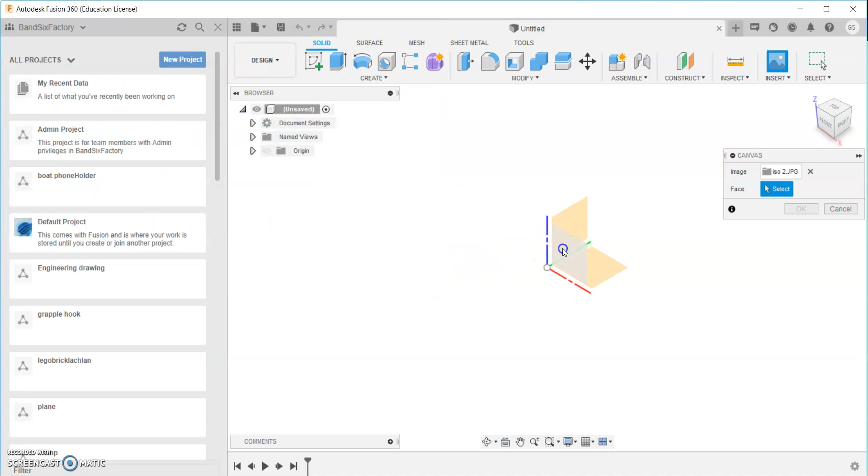First, let's open up the drawing and insert it into my main sheet so I don't have to go through the whole process again. I'll make it a bit bigger so I can actually see what I'm drawing, flip it the other way, and move it up into that area out of the way here.

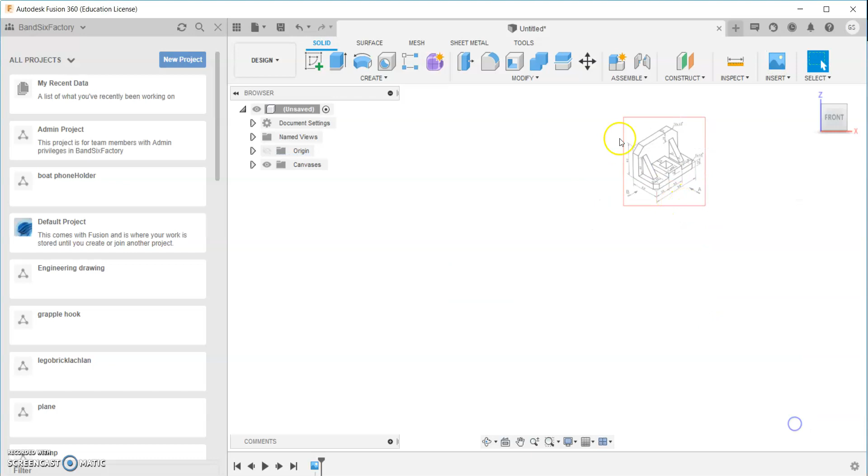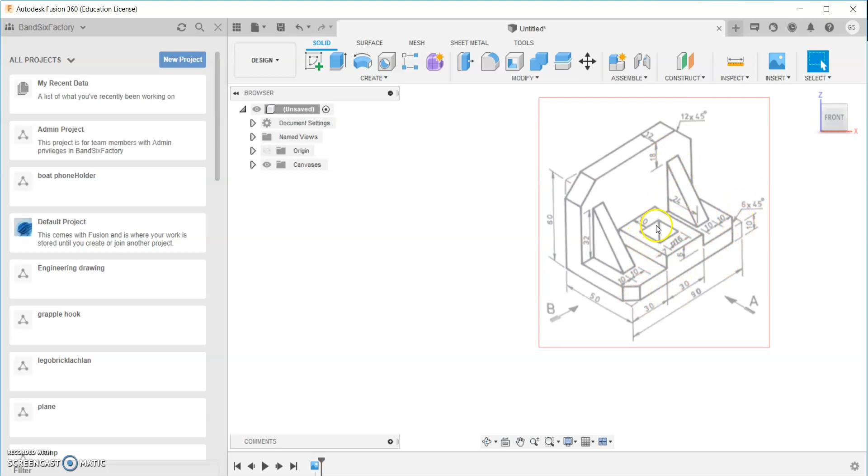Once we've got our canvas in there, we can zoom in and look at our drawings. This object is 90 millimeters long and 50 millimeters high. We have some 45-degree shapes in here that we cut out, and a square hole that's 16 millimeters, 10 millimeters.

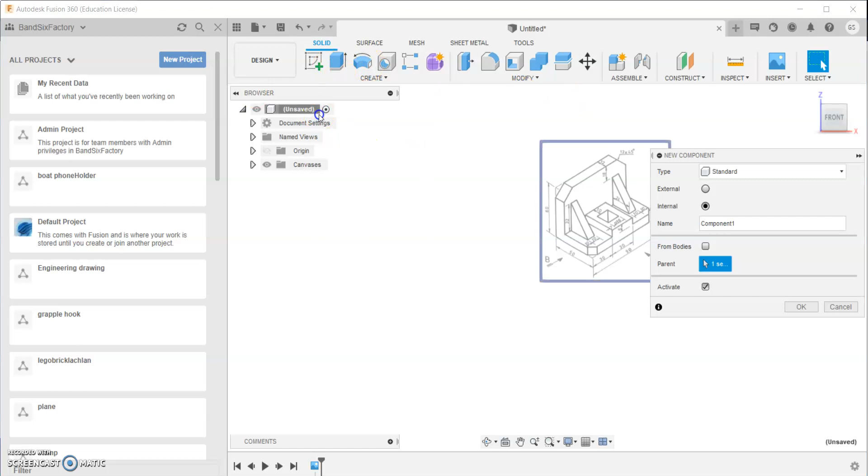So what we'll start off with, let's create a sketch. First we're going to create a component, so I'll go up here and select new component. Now it's active, so we'll start a sketch and draw that front view, which was 90 millimeters long, 50 millimeters high.

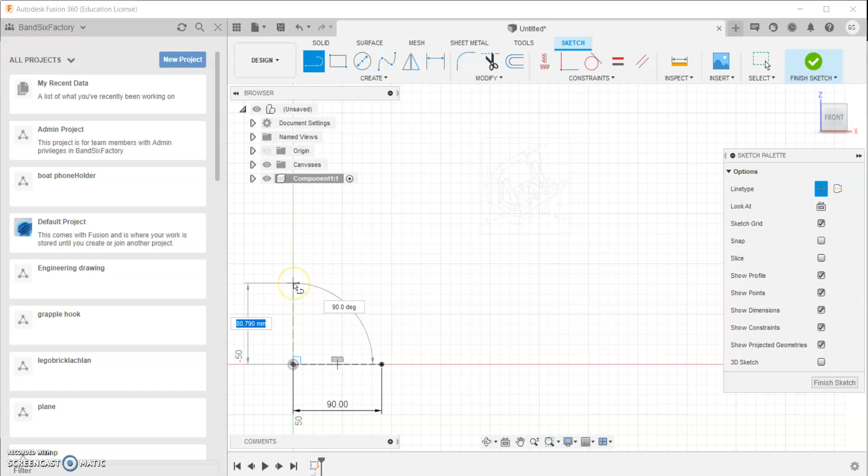I'm going to start to draw with construction lines. Let's go 90 millimeters long and 50 millimeters high. Then we have some 45s in there, 12 by 45, meaning the face is 12 millimeters long. That's a new little challenge for us. I'm going to finish off this shape over here, and then we'll go down here.

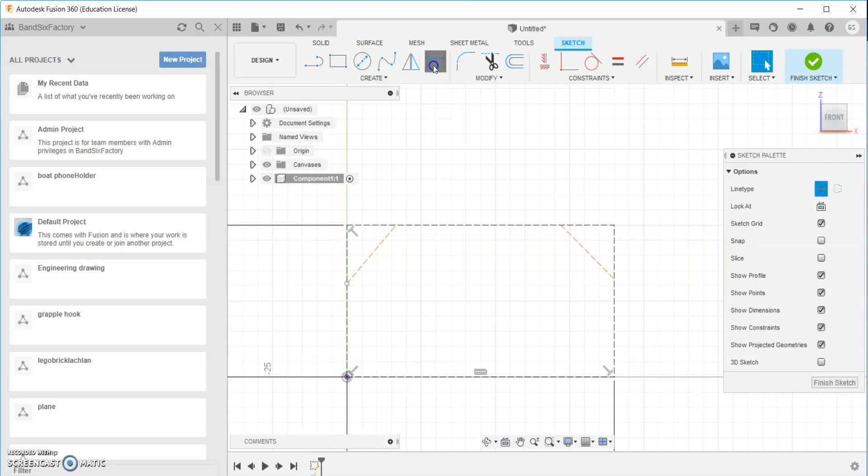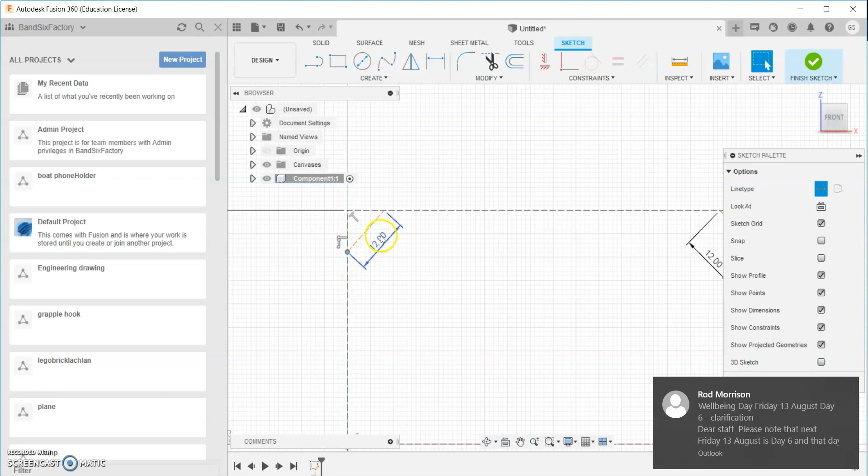Now I'm going to draw a line like that and a line like that. Let's get this length right first: 12 millimeters that way and 12 millimeters that way. We notice that one didn't actually connect, so we'll just drag that and snap it onto that point. See how it just made it snap? That's created a constraint there.

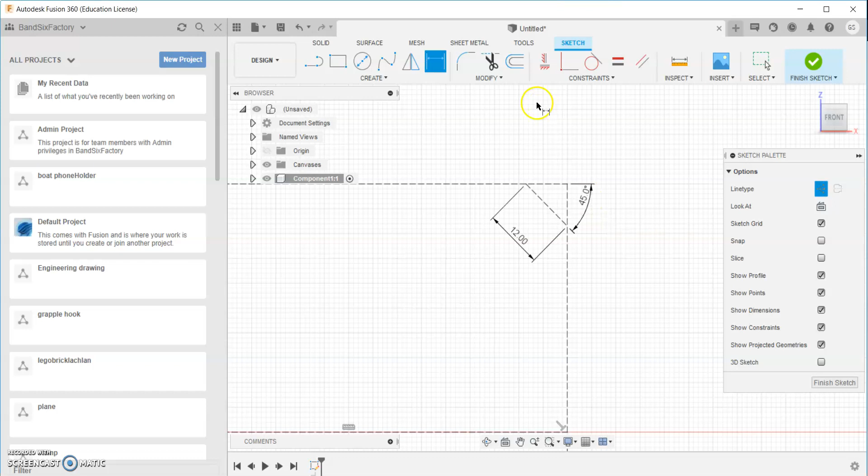Now let's get this angle right for the next part. Make that 45 degrees there, and we'll do a little 45 on this one too, 45 degrees for that one, and then that's 12 millimeters.

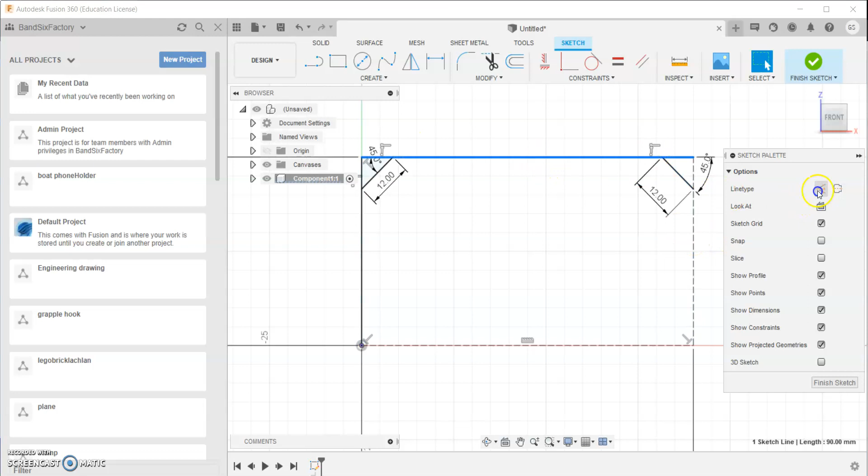So what we can then do is select the line and make that a solid line now, and that one there too, and let's make this one solid, solid, solid. We can then modify and trim. Oops, didn't want to do that, step back there. I'm going to trim, let's get rid of that one and that one, trim that one which is just coming up as red. Go OK.

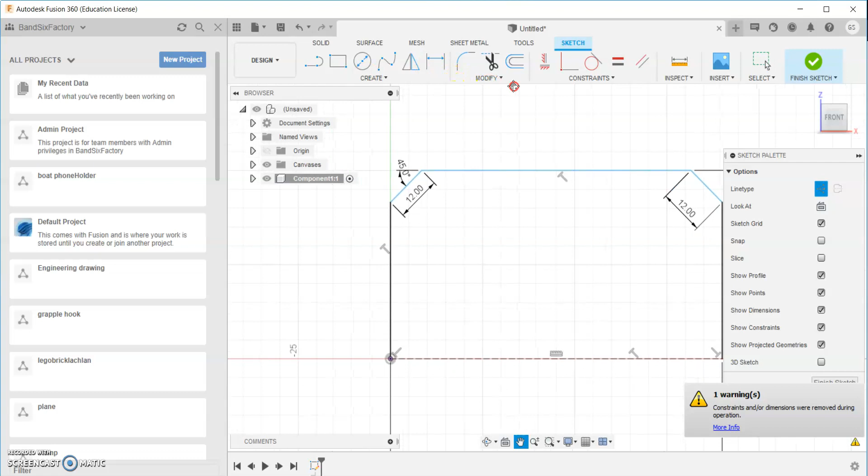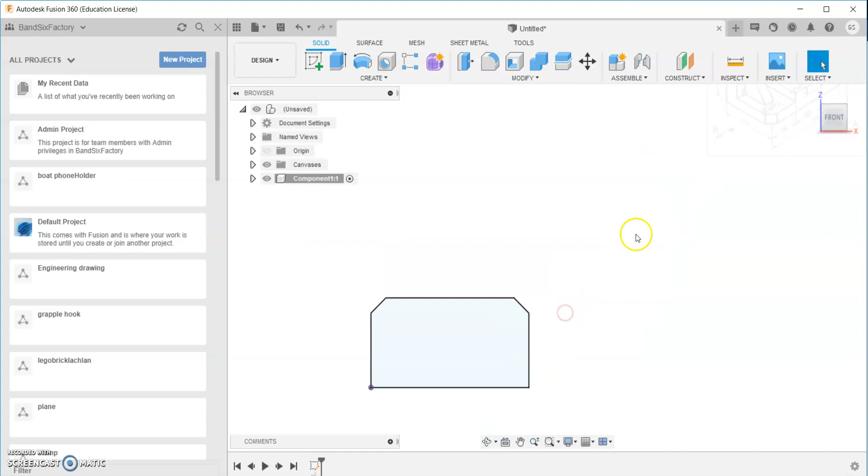Now what we can do is start to put in some dimensions here between that one and there, it's 50 high. I'm going to convert this one into a solid line as well. So we have that, we'll finish that sketch there. Just going to have a look at the drawing, and the depth of it is 50 millimeters deep.

So let's just draw that. We'll now go into extrude, and we're going to make it 50 millimeters.

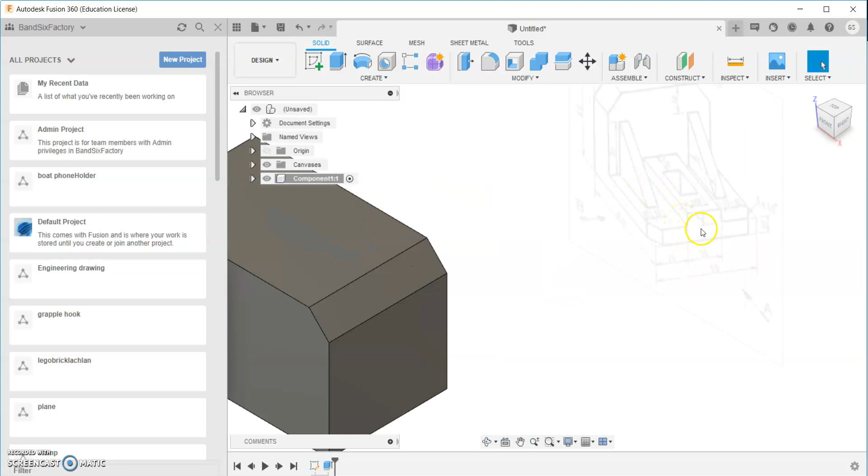Enter. Now next, what we can do is draw in our next shape, which is 30 millimeters, 30, and then that one's 30, and it's now 6 millimeters high. So we've got a 10 millimeter and a 6 millimeter, 10 millimeters here, 6 millimeters here. I'm going to draw another sketch on the front view here.

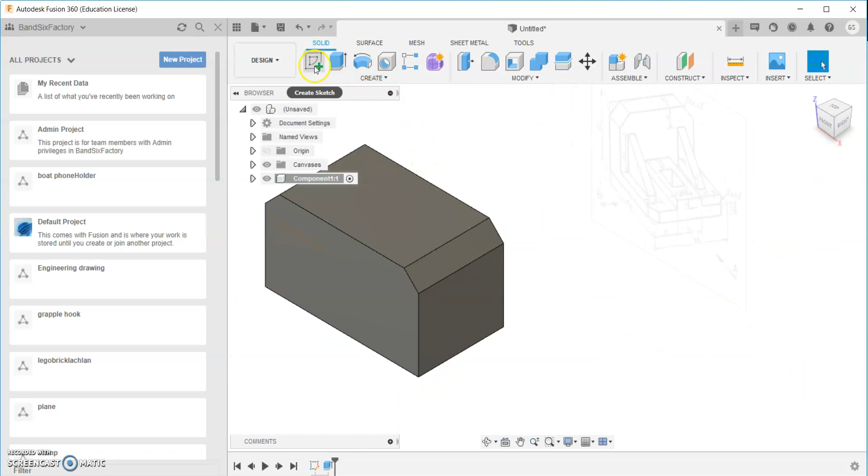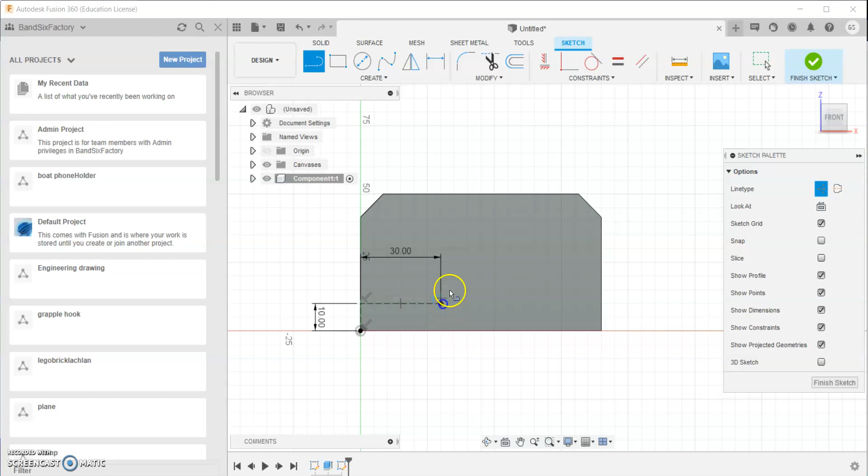So it's 10 millimeters up. I'm going to do a construction line and type in 10 millimeters to there, and it was 30 across here, and 6 millimeters up. We can probably just do it with a normal line, 6 millimeters there, another 30 across here, down 6 millimeters down, and I'm going across all the way to the other side.

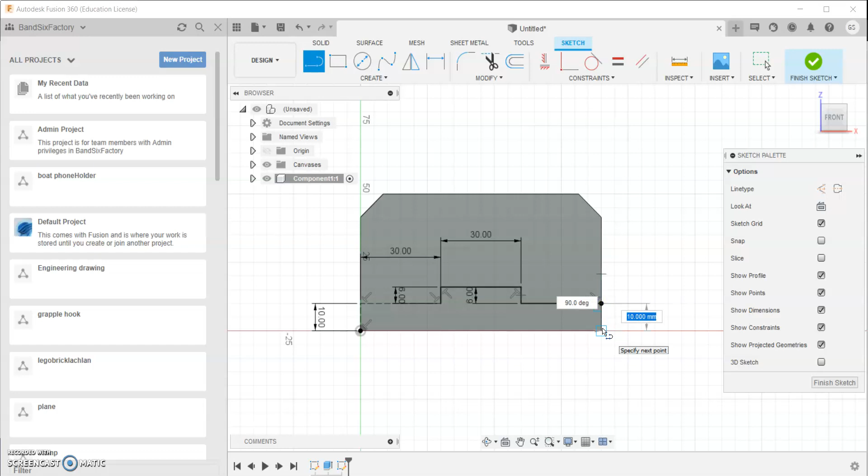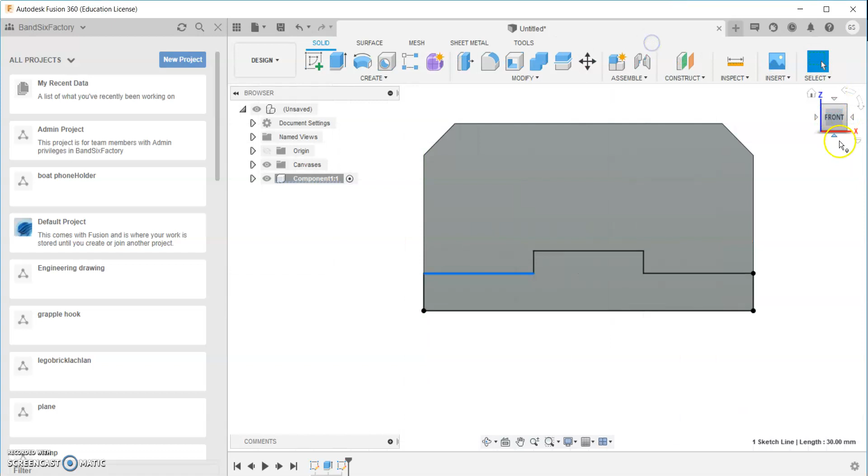Now I'm going to finish that sketch, and I'm going to get that one there. I'm going to select the opposite to what we've got here, and let's extrude that back. We have to check out how far we need to extrude it back by.

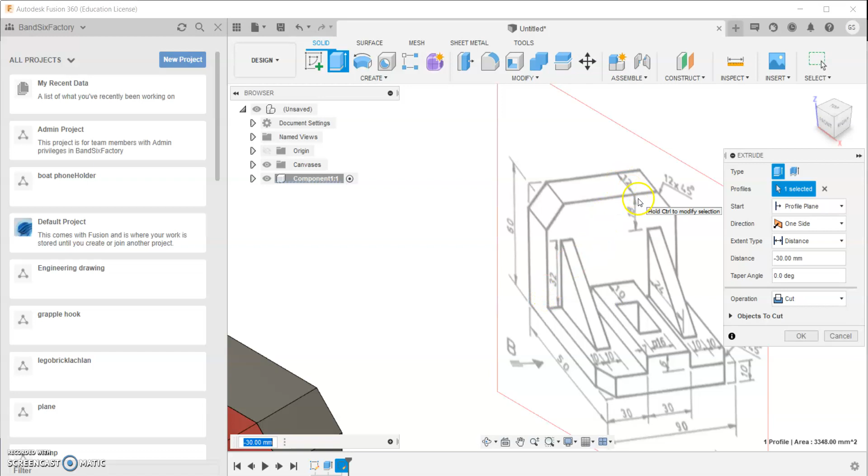So this thickness is 50 millimeters here, and that's 12 millimeters there. If we do the maths on that, we can extrude it back 38 millimeters, in the minus 38. Enter.

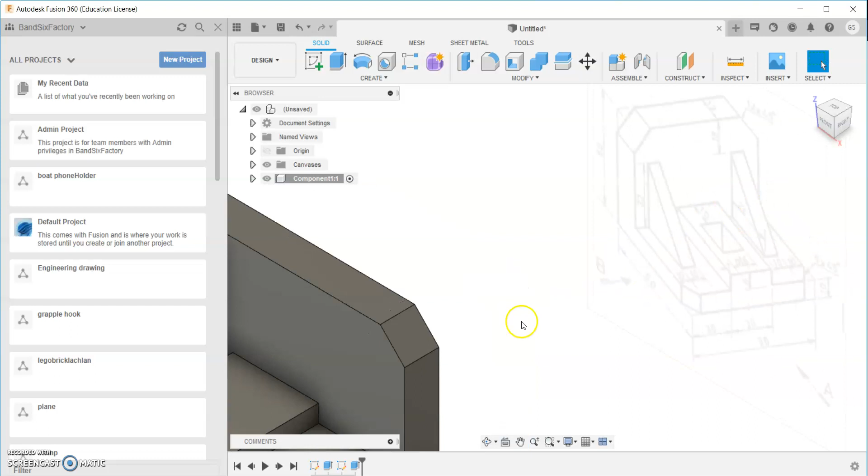Okay, so the next thing we have to do is these little add-ons, and we can do the square hole in here as well. So let's just draw another shape up here, and I'm going to draw a square. I'm just going to place it somewhere on there. Don't know what size it is yet or what's going on.

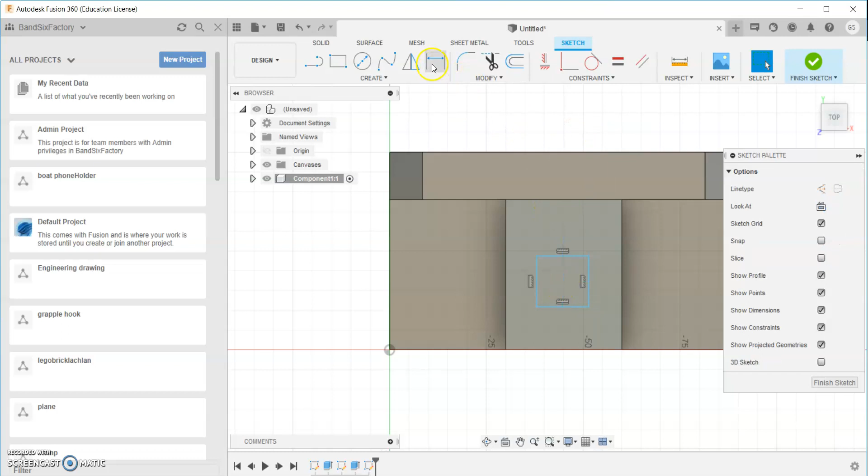Now let's constrain that by drawing a line from there to there. That was 10 millimeters that way. Just going to have a look at some of these other ones. Go OK. Check the sketch again.

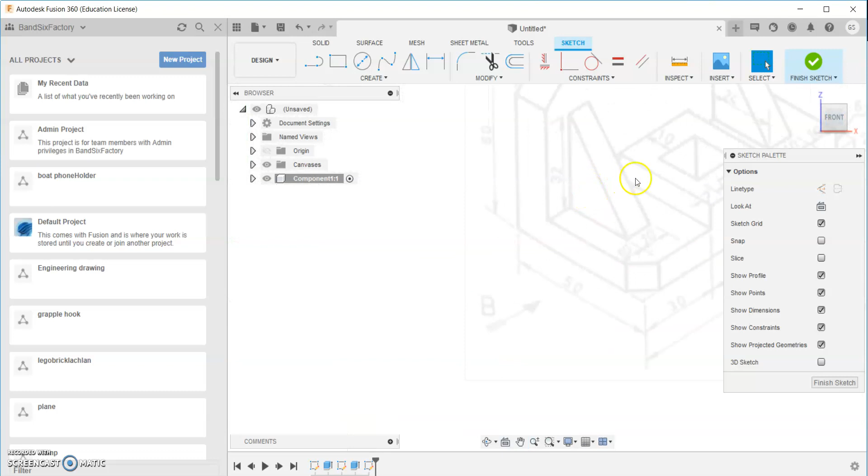What did I say? It had to be 10 millimeters, 16 millimeters around, and I think it's 7 millimeters in from the side there. See how it's got number 7 there? So let's just get back to sketch.

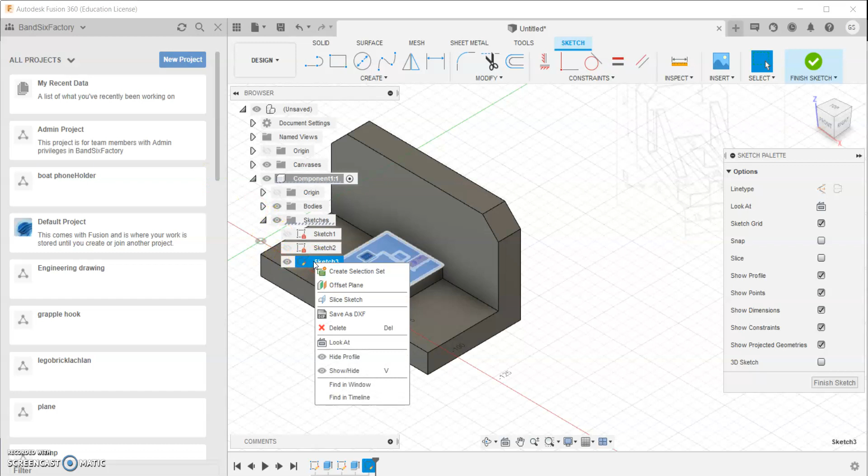And we can then actually go back in and edit that sketch by opening this up. If I go to the sketches, this is the sketch tree, and we just go back in. We're still in edit mode actually, so that's okay. So let's just go in and actually put some dimensions on that.

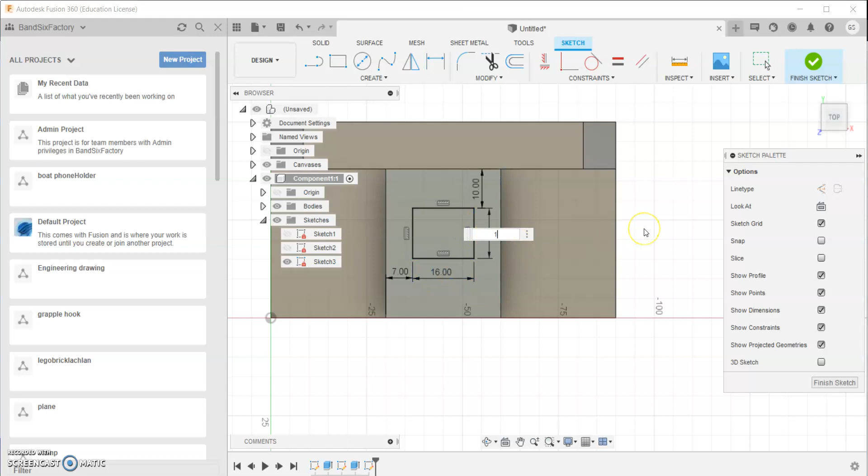Actually, I want to do the view in from there. Better to work in the actual plane, so 7 millimeters that way. And so we know that this is actually 10, and this is actually 16. Okay, cancel, and then finish that sketch.

We'll do a view here, and we can extrude this shape. I'm just going to go distance all, so it's going to cut through, cut, and go OK.

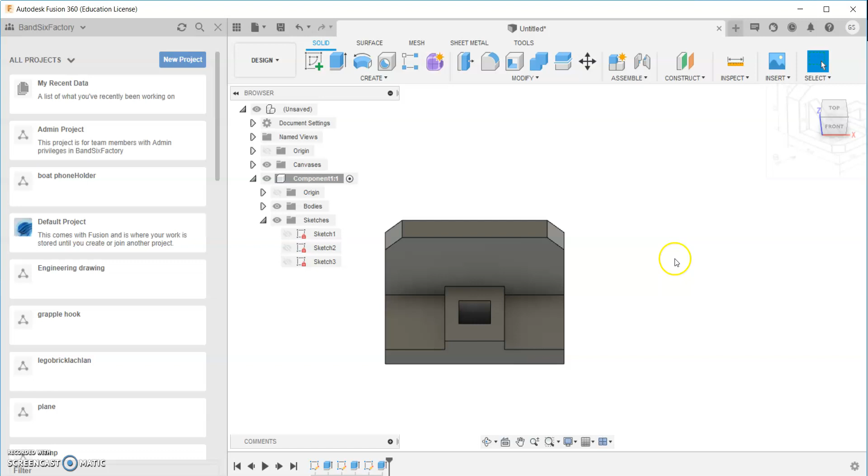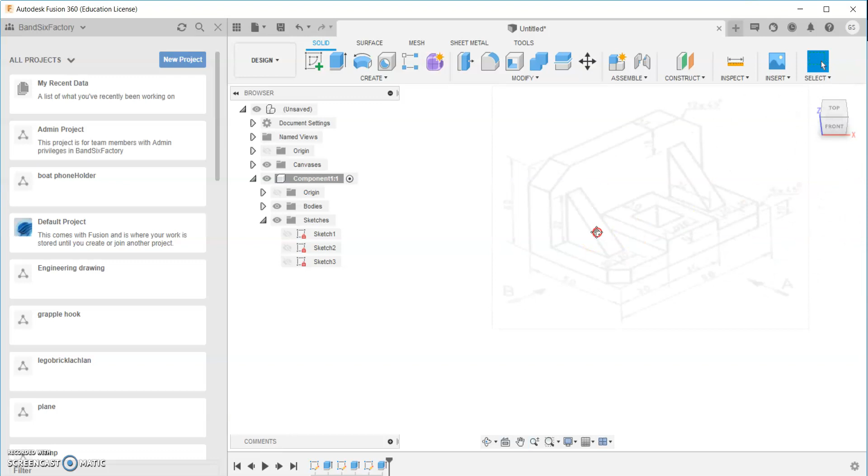Now the next part, we've got to create another shape here. So what we can do, we might actually create a plane offset from another edge. So we have to create a plane here, draw this shape. So that's 32 by 24, so 32 high and 24 wide.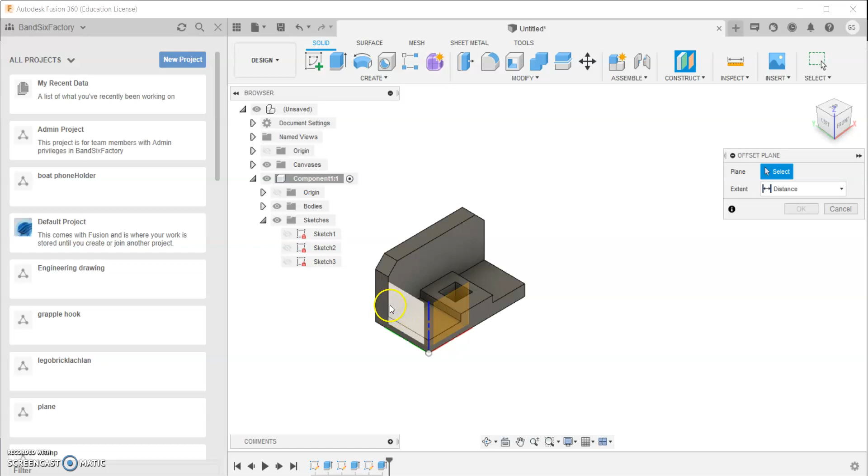All right, so let's just go into this. I'm going to click on this, and this is where we can actually start to use some planes. So I'm going to select a plane, an offset plane. Okay, so we're going to select our plane that we want to draw off, which is this surface here.

And we want to go back, what was that distance again? That was 10 millimeters back that way. So we're going to say we want to go back 10 millimeters and hit enter. Then we'll do a sketch on that plane, and it was just going to go down here.

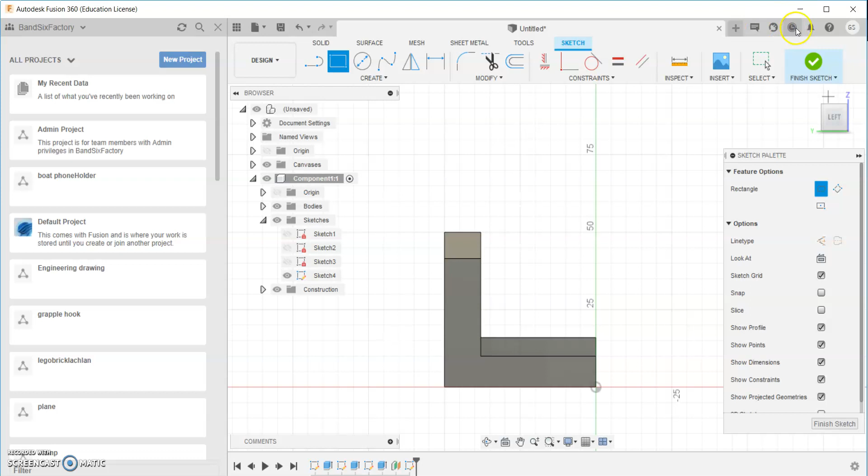We can actually constrain. I've got to look at this thing here. Let's just go into our preferences here for a second. Preferences. And we can go into design.

Auto project edges on reference - I think that's what we want to click. Or allow 3D sketching of lines and splines. I'm going to apply that and go OK.

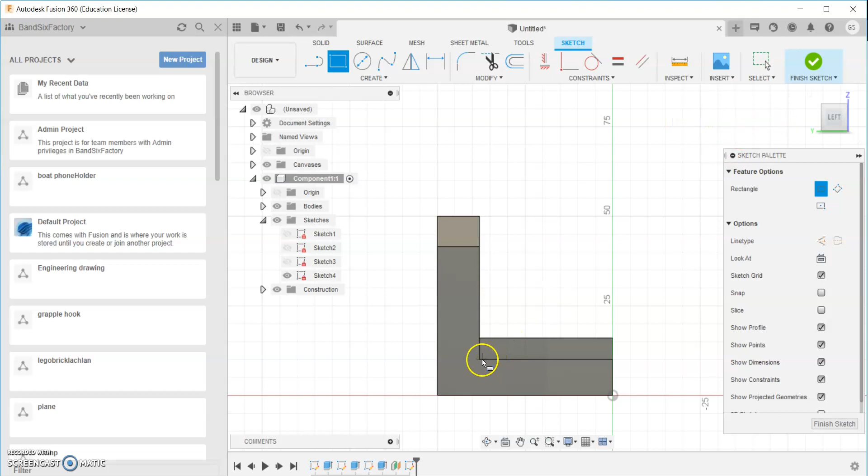Still not picking up that edge. Okay, I'll just have to come back to that. But anyway, do we draw a shape here? Oh, here we go. Yes, it's now picked up the edge.

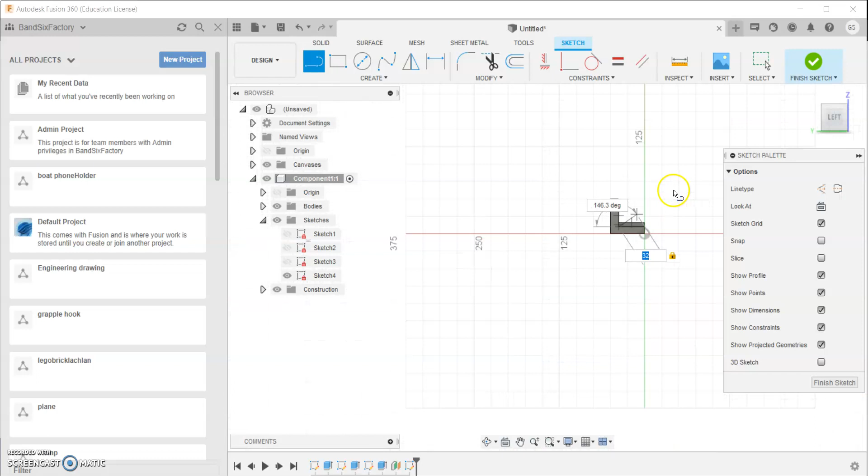So let's go up 32, I think it was, wasn't it? Or 23. Let's go back and have a look at our drawing again. What does it actually say there that we had to do? Let's cancel that for a sec. Oh, 32 up and 24 wide. Okay.

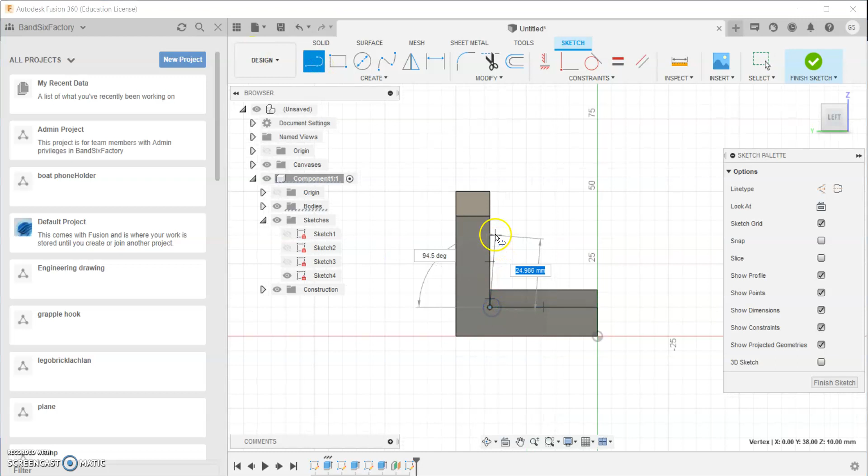Okay, drawing a shape again. And we're going to pick up that edge, 32 up to that point. Okay, and then we're going to draw another line out from there, which is 24. And we'll draw another line from there to there. Finish that sketch.

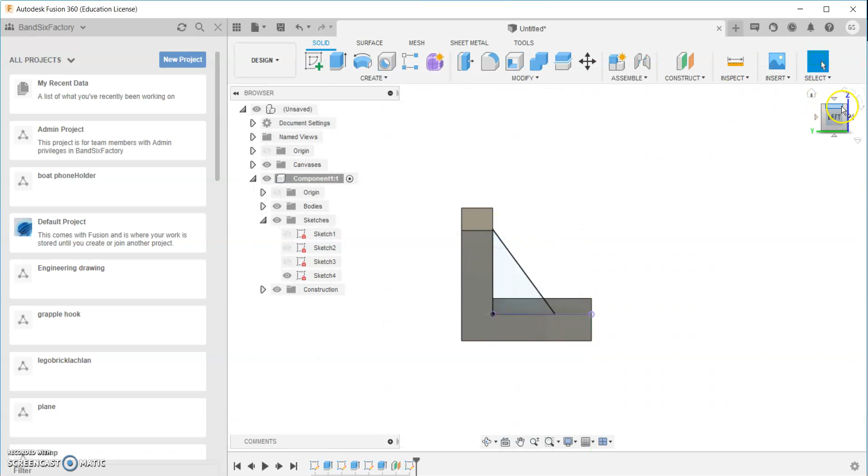And we'll extrude that out by, was it 10 millimeters? What was the drawing? What did it say to do there? 10 millimeters. Okay, and we go extrude out by 10. We've got one of those drawn.

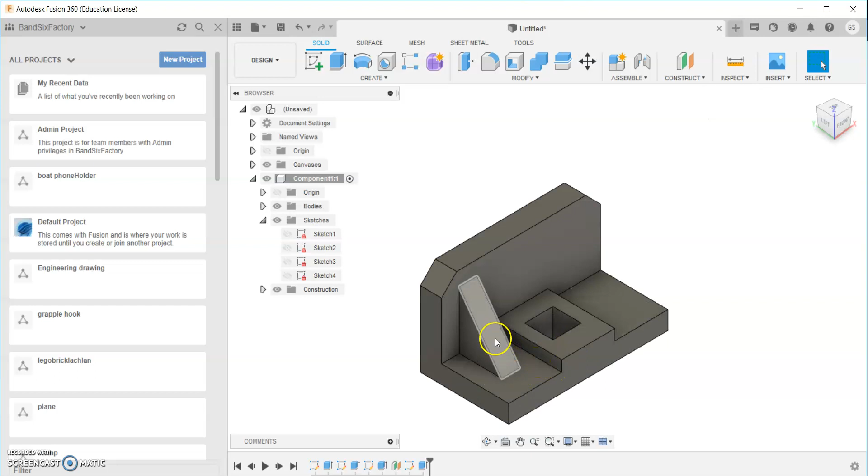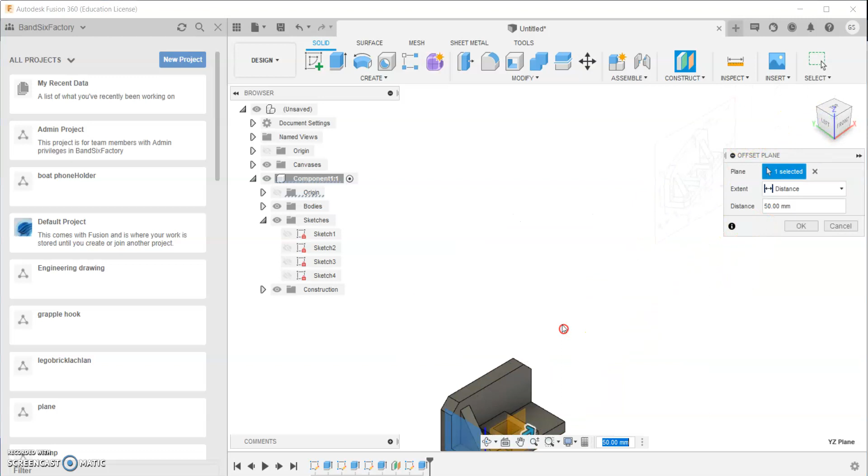Now, what we can actually do here, we can mirror this. So let's just draw another plane, construct a plane, offset plane from that edge, and it was about 50 millimeters to the halfway point from - no, it's not 50 millimeters. What's the actual width of that? What did we say it was? It is 90. So we've got to go back 45.

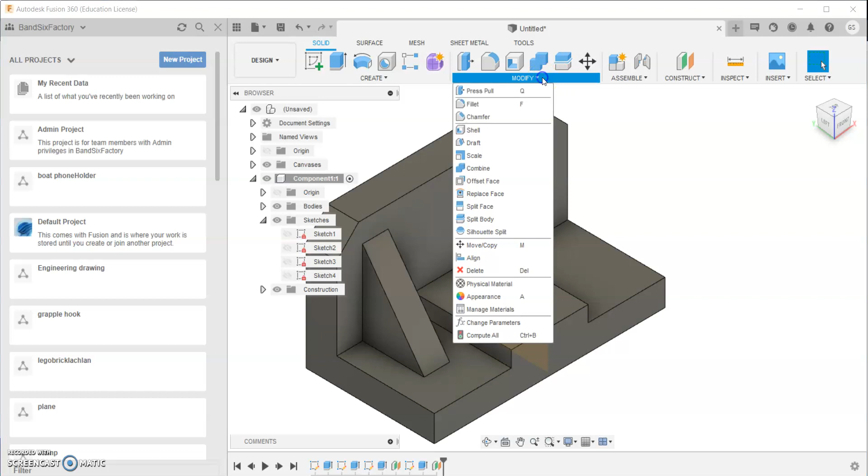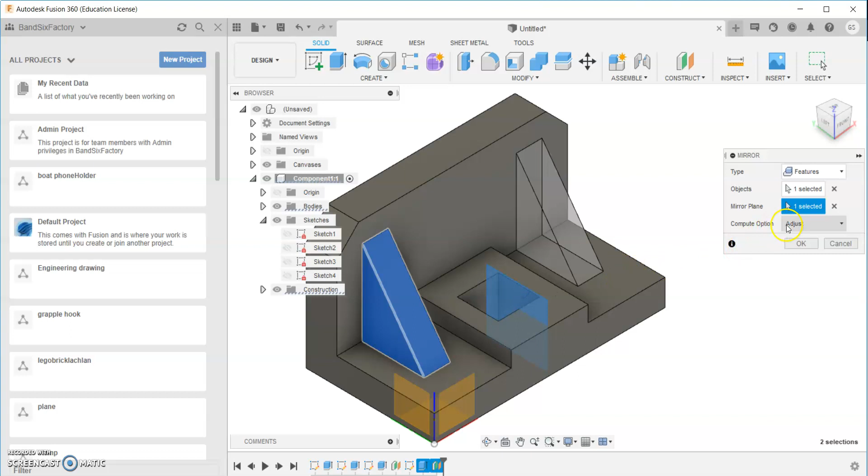Okay, and we'll construct a plane there. And let's go modify as a mirror. Where is it? Can anybody - oh, here it is, mirror. Mirror, and we're going to select a feature. Mirror plane is that. And go, okay, so now we have created that there.

Next thing we need to do is put the 45 degree, the last little bit, 6 by 45. Okay, so that's easy. Put the top view in there.

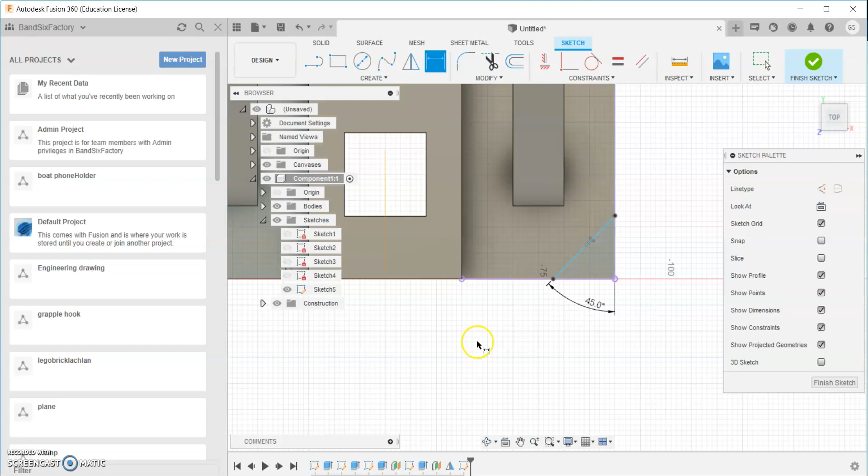I'm going to create a new sketch on this surface here. And I'm just going to draw a line to there, there to there. Okay. And I'm going to actually create a 45 degree angle between that point and that point, 45 degrees from there to there.

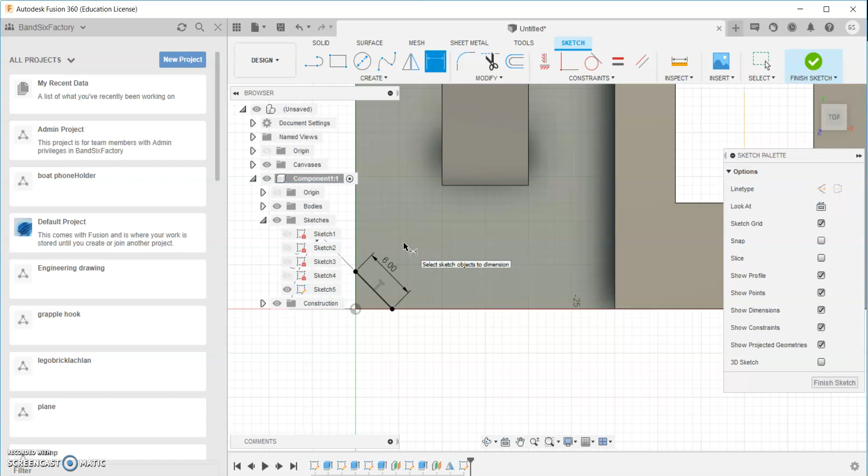Okay, that's okay. So adding this dimension will over-constrain the sketch. Choose OK to create a driven dimension. So that's fine. We can actually - we know that that's actually 45. We just need to get this measurement here to be 6 millimeters. That's on that, which is good. 6 millimeters for that.

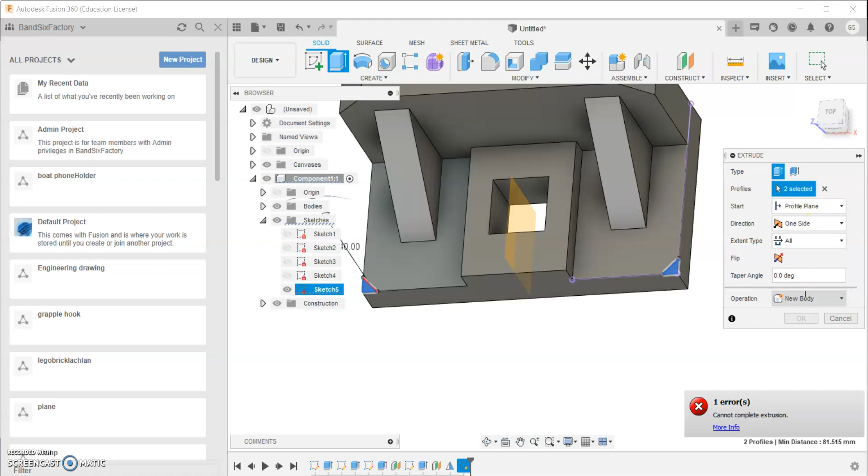And we'll finish those sketches. And we are now going to extrude these, this shape and this shape, distance all. You're going to do a cut. That shape and that shape. Okay, so we've got that drawn.